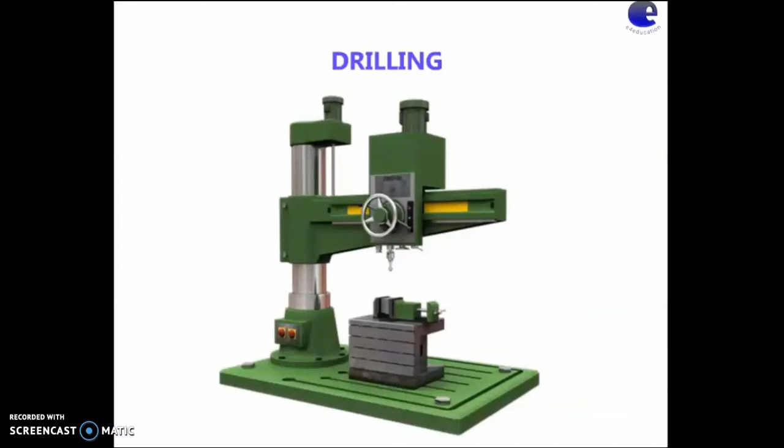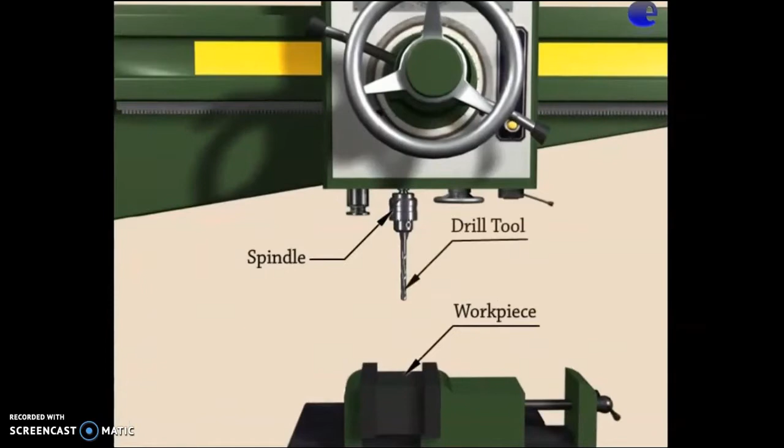Here you can see the drilling machine. Operation of producing a hole in the workpiece is termed drilling. This is the spindle, the workpiece is placed here, and this is the drill tool. This is how drilling is done.

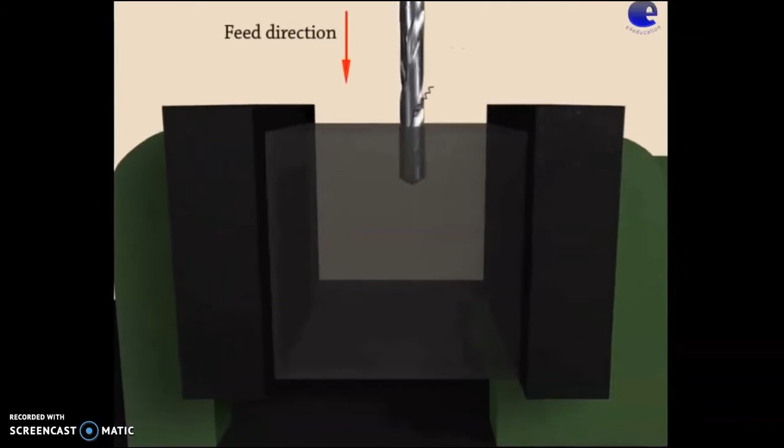You can see a close view of the workpiece and the drill tool. The tool is rotated and it penetrates. This is the feed direction. It is done to remove the solid metal from the workpiece to produce a circular hole.

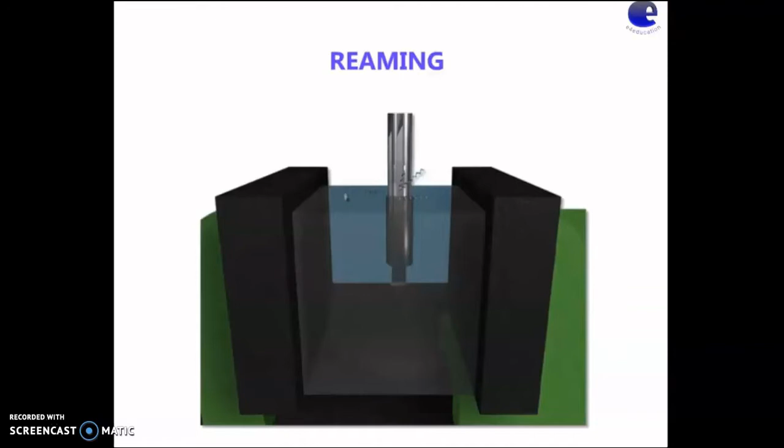Next is reaming. Reaming is the finishing of the already drilled hole, and the tool used is the reamer. It is the operation of sizing and finishing a hole already made by a drill using a tool called reamer.

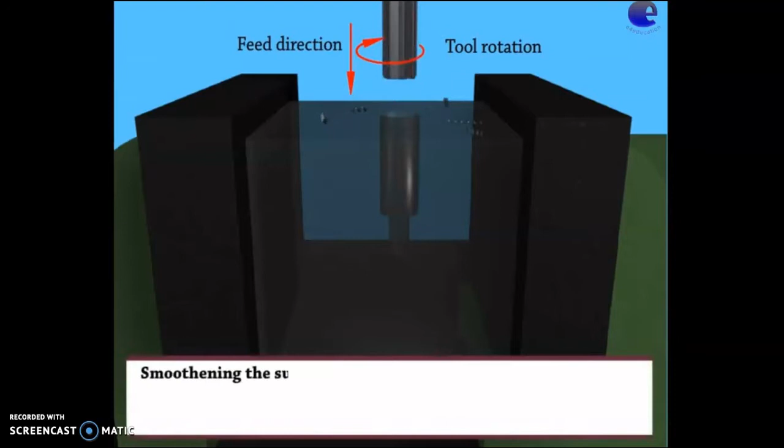This is the tool rotation, and it is fed in the direction like this, smoothing the surface of the drilled holes with a reamer. It removes only a small amount of material, on the order of 0.1 mm to 0.3 mm, and produces a smooth finish and required size.

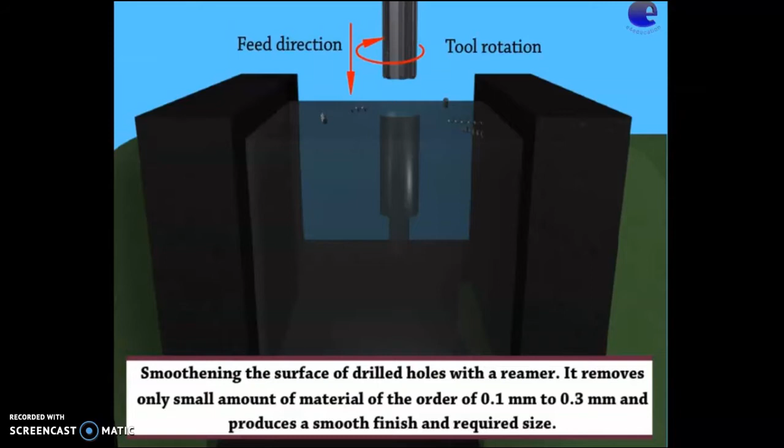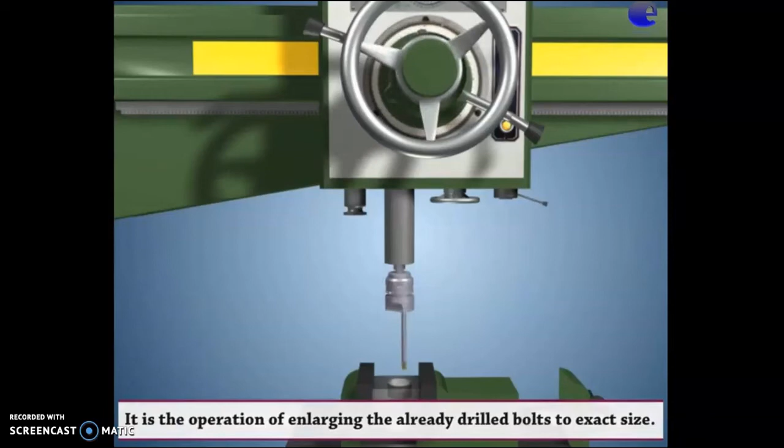Next is boring. Boring is the enlargement of the already made hole, and we can see how it is working. This is the boring tool, and this is the workpiece. It is the operation of enlarging the already drilled hole to the exact size. On a drilling machine, it is carried out by a boring tool like this.

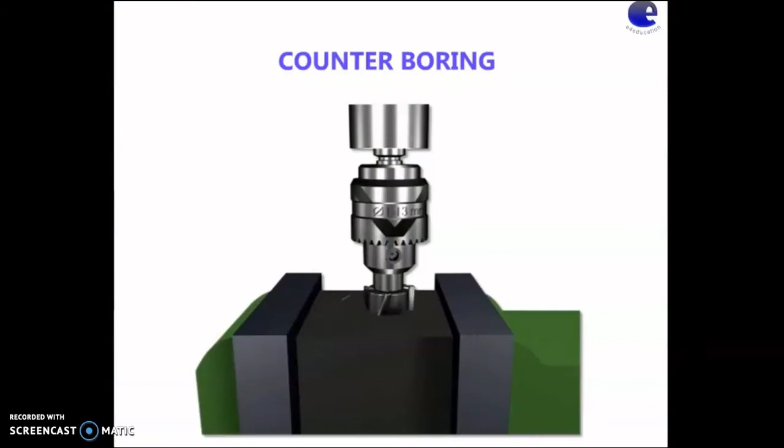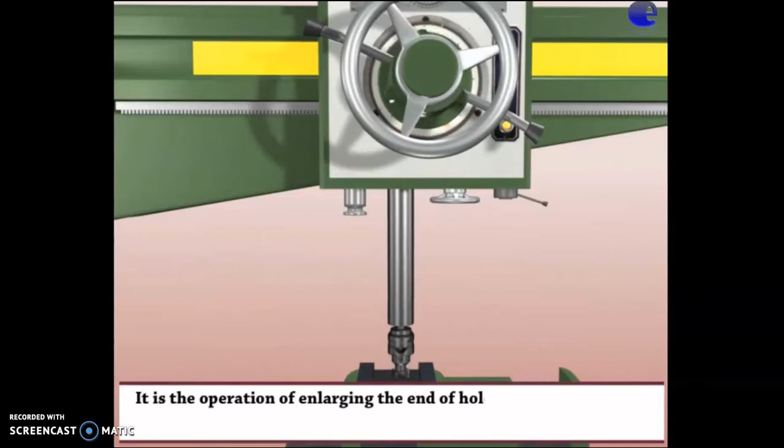Now, counter boring. This is the counter boring tool, here is the workpiece. It is the operation of enlarging the end of the hole cylindrically as for the recess of the countersunk piece. You can see here, it is to increase the size of the hole at one end only, to a small depth, like this.

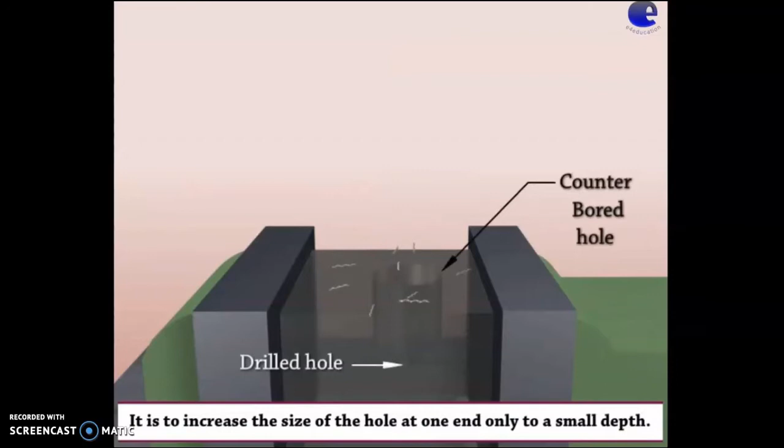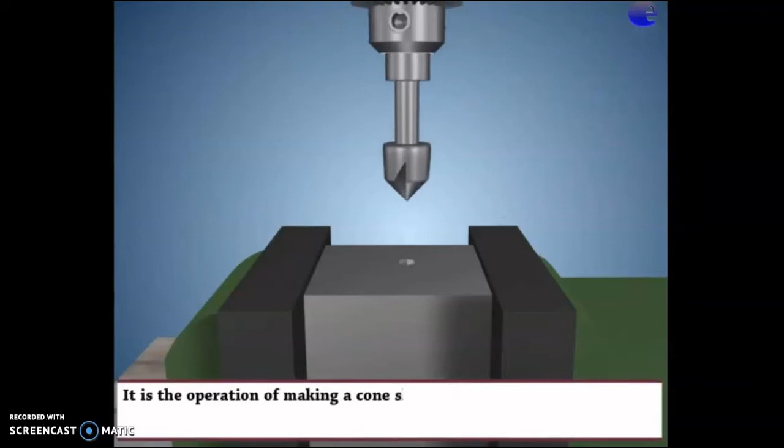Now, counter sinking. This is the counter sinking tool, workpiece, this is the pre-drilled hole. It is the operation of making a cone-shaped enlargement of the end of a hole for the recess. The tool enters the workpiece axially and enlarges the top portion of an existing hole to a cone-shaped opening. So here a cone-shaped opening is provided.

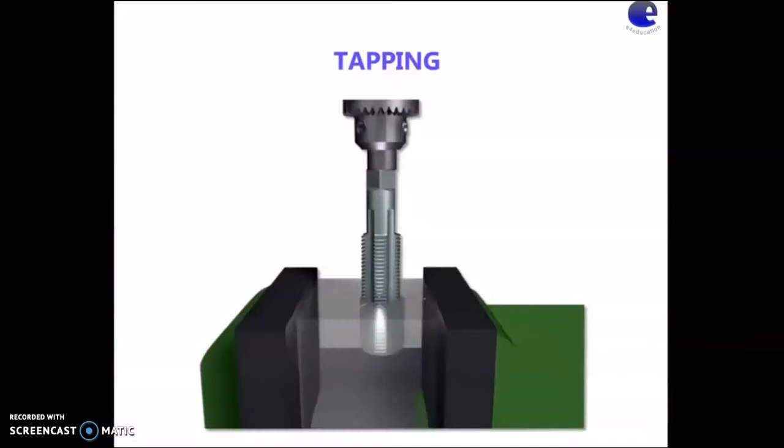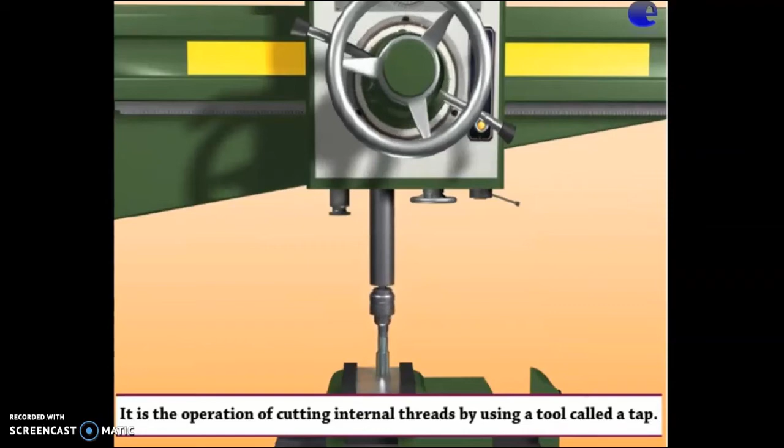Next, tapping. Tapping is making the internal threads. It is made by the tapping tool. Here is a workpiece, tapping tool. It is the operation of cutting internal threads by using a tool called a tap. A tap is similar to a bolt with accurate threads cut on it.

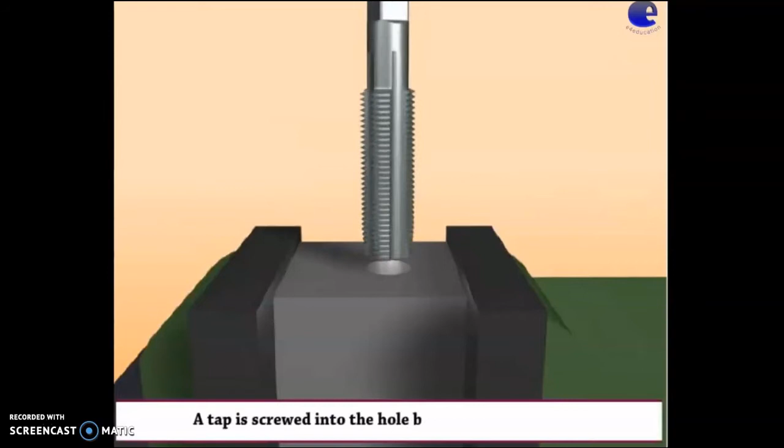And here you can see the closer view. A tap is screwed into the hole by hand or by machine. Now you can see a threaded hole here.

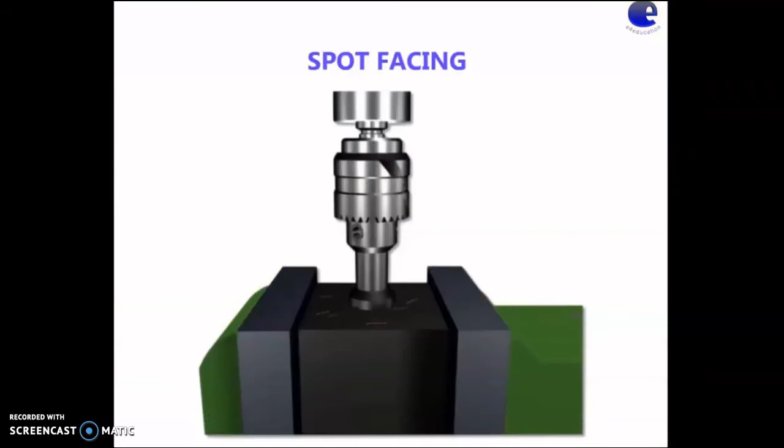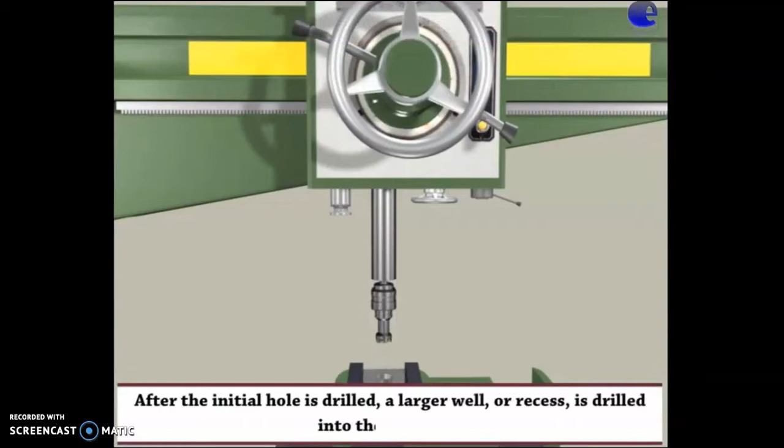Next, spot facing. Spot facing is a mechanical drilling machine process. After the initial hole is drilled, a larger well or recess is drilled into the material. The head of the screw or nail fits into this well. This allows the nail or screw to sit flush with the surface of the item that is drilled.

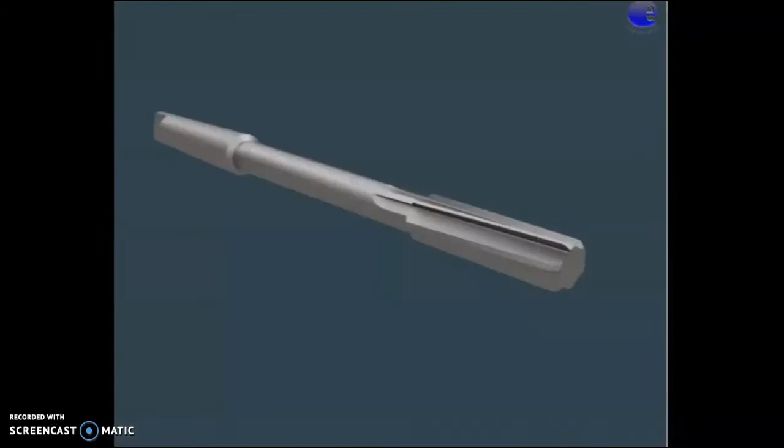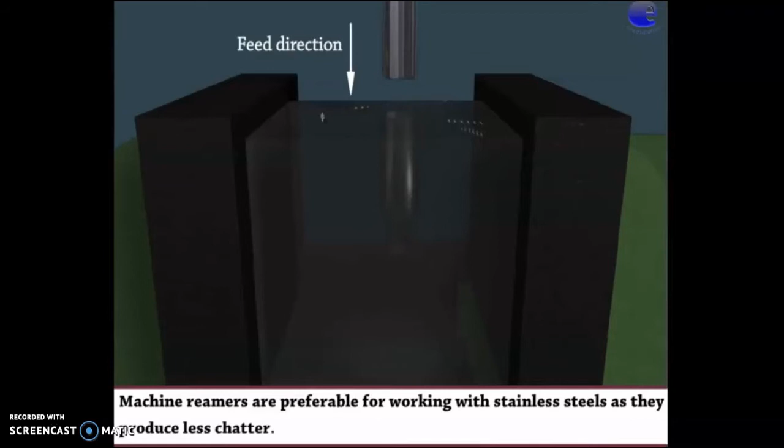Next, machine reamer. This is the reamer tool. Machine reamers are provided with a Morse taper shank for holding in the machine spindle. Machine reamers are preferably used for working with stainless steel as they produce less chatter.

Types of flutes: straight flute and spiral flute. The spiral flute machine reamers help the chips flow better than the straight flute. Here you can see the rake angle.

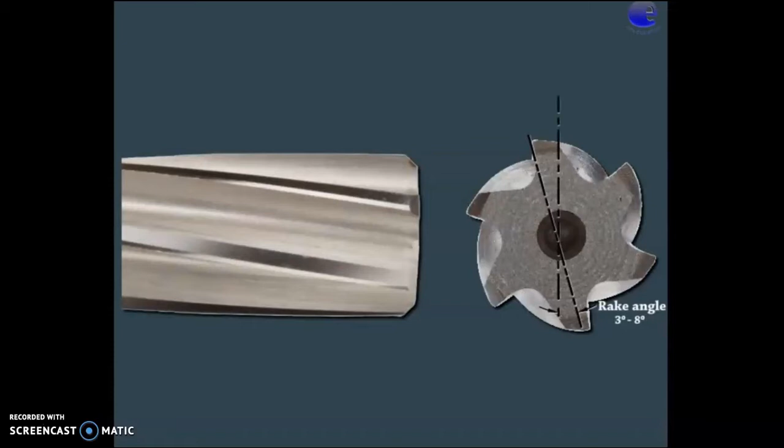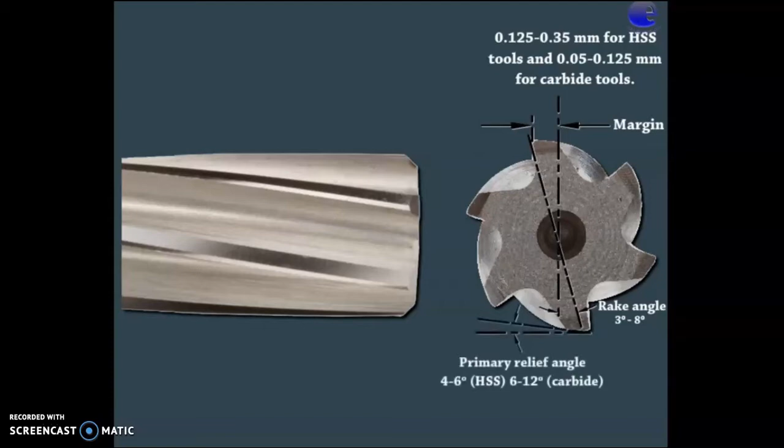Other dimensions: primary relief angles, chamfer angle, chamfer is also provided, chamfer relief angle, helix angle. Parts of drilling machine, first one, drill chuck.

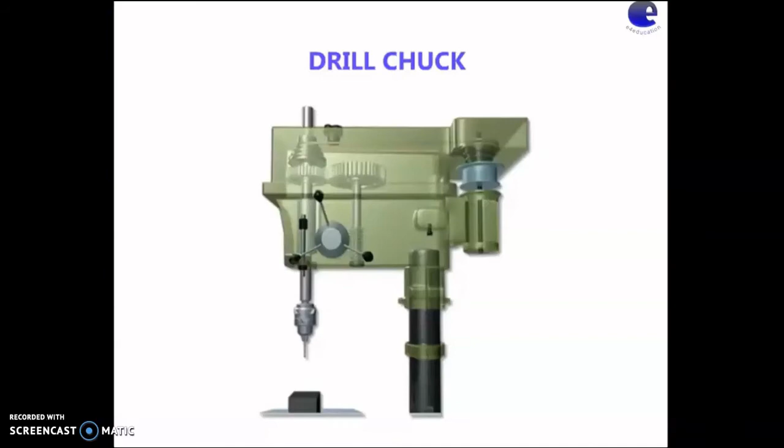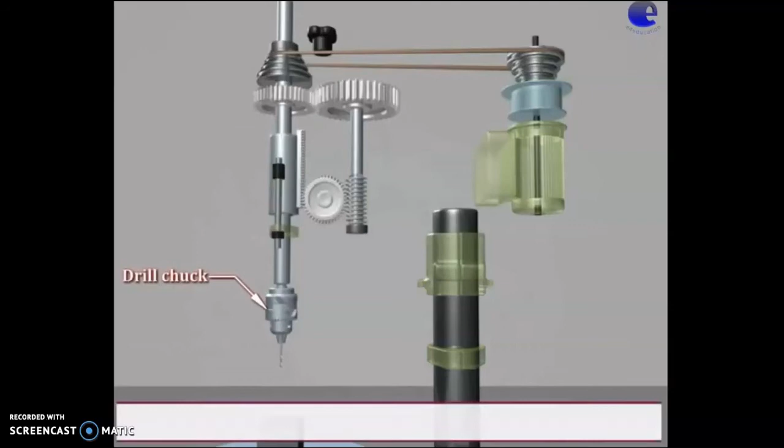Here you can see a drill chuck. It is used on a drilling machine for holding the straight shank drills. The drill is inserted into the drill chuck and locked in the drill chuck by a key to grip the drill rigidly.

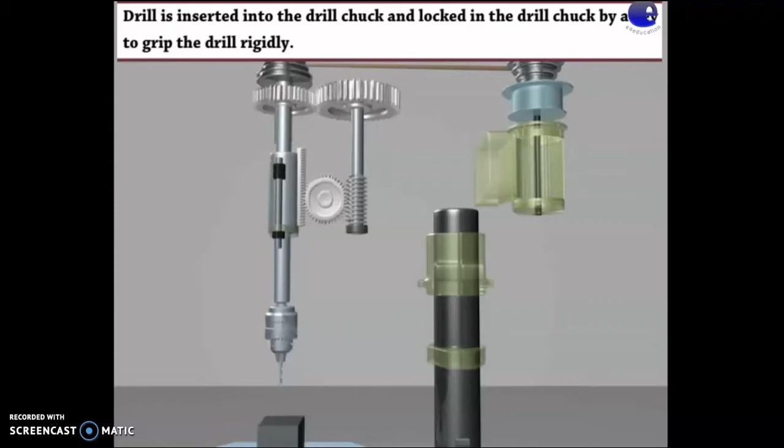Next is drill sleeve and socket.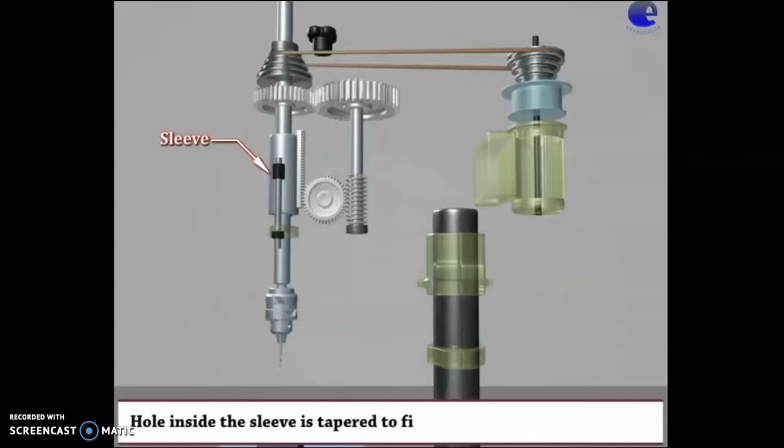This is the sleeve. It gets power from the motor through the bevel gear. The hole inside the sleeve is tapered to fit the tapered shank of a twist drill. This is the socket. A drill socket is used to hold a twist drill with a shank which is too large to fit into either the drill spindle or sleeve.

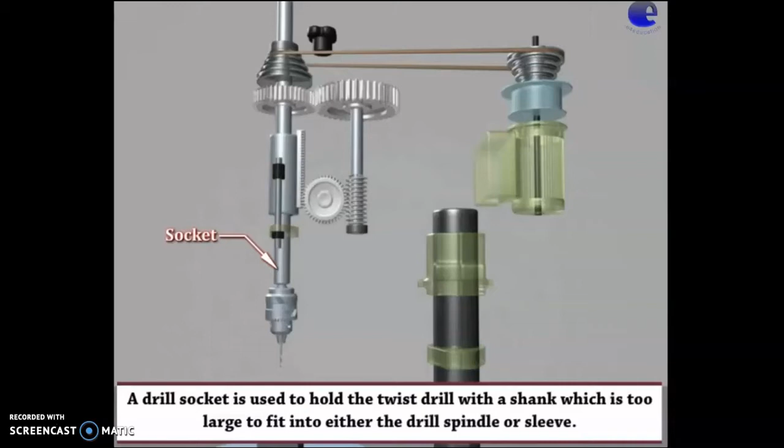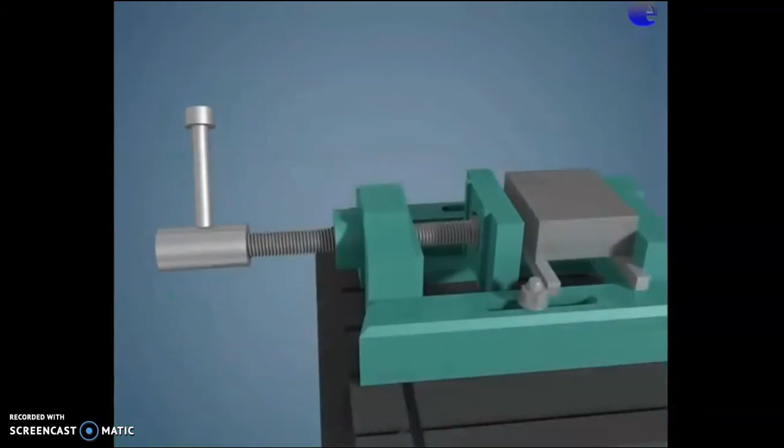Machine vise. This is the machine vise. This is a packing piece, and the workpiece is held on the machine vise by screwing. This is the fixed jaw and this is the mobile jaw.

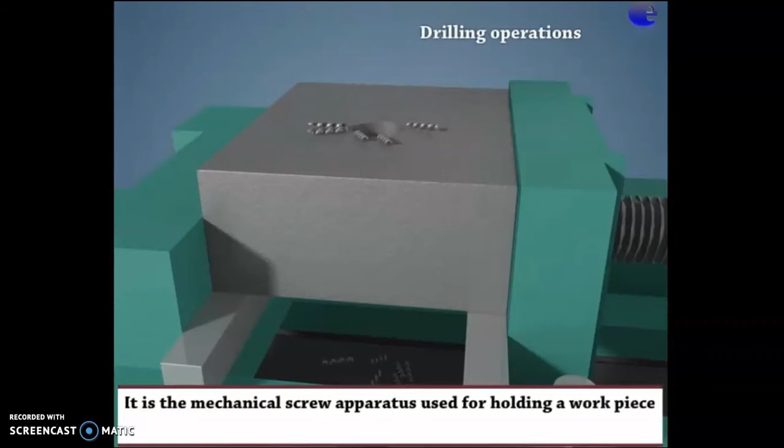Now after placing, the drill bit is rotated. It is a mechanical screw apparatus used for holding a workpiece to allow the work to perform operation.

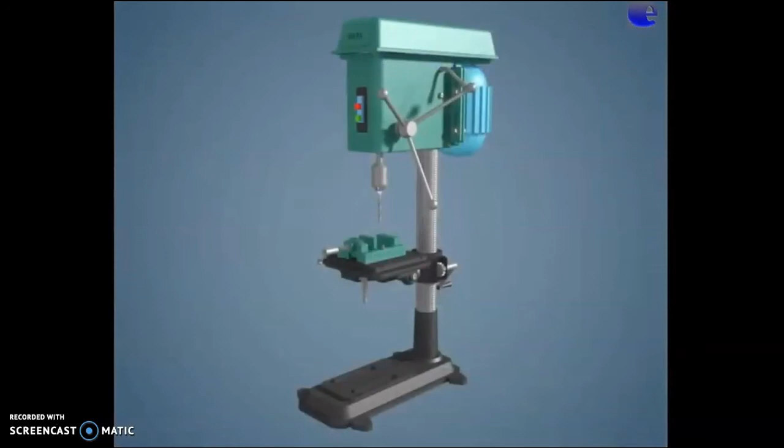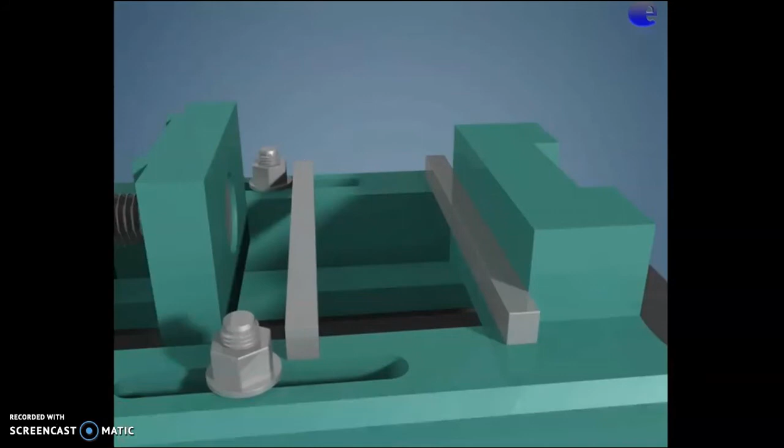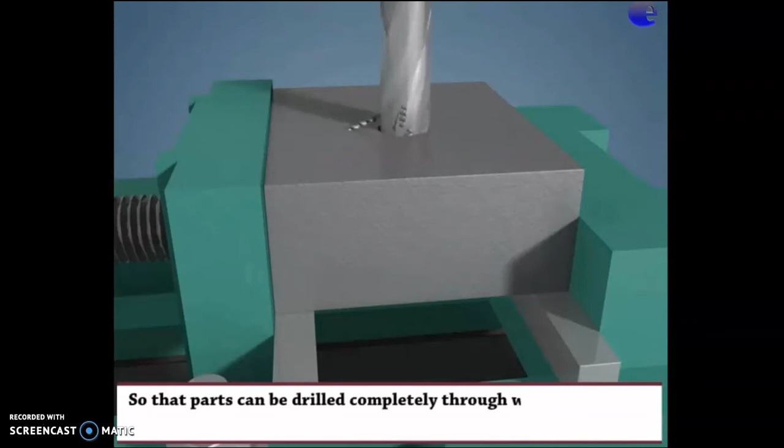Drill parallel. It is a packing piece kept under the workpiece. Here you can see a machine vise and two packing pieces or parallels are placed. It is a pair of steel rectangular bars which is accurately machined, and the workpiece is placed over that. It is used to raise the workpiece above the drilling machine table so that the parts can be drilled completely through without damage to either the vise.

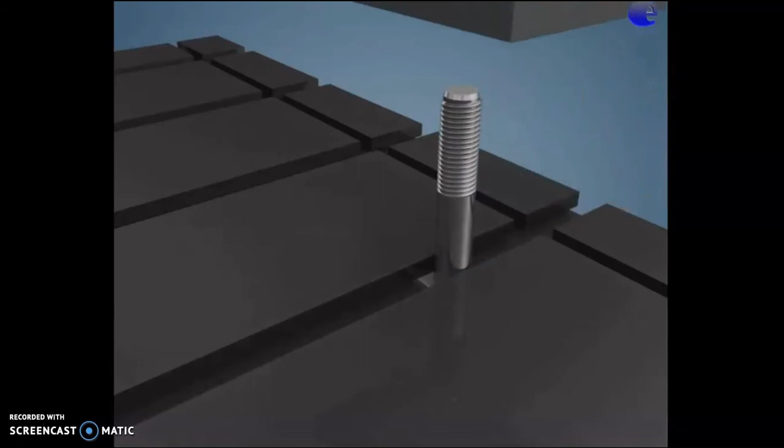Next is clamps and bolt. You can see here T-slots. The screws are placed there, and the clamps are used to hold the device. Using this, packing should be as far as possible of the same height as the work.

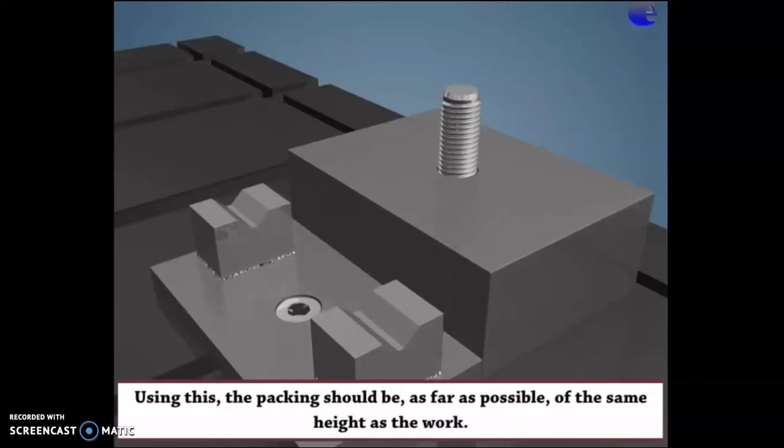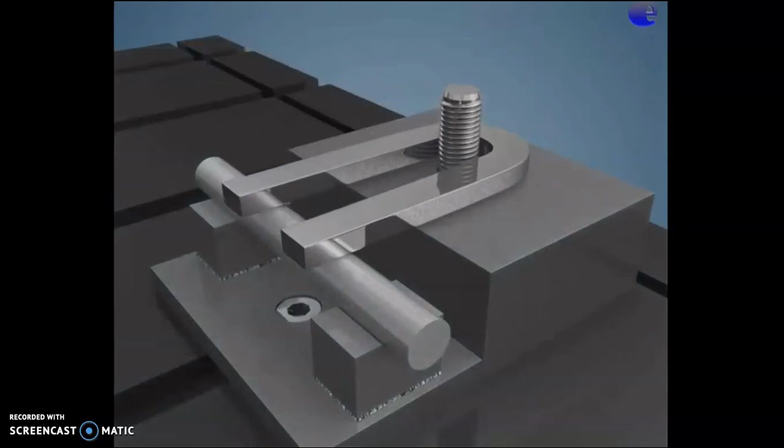This is the work and this is the clamp. It is a packing. Using clamps and bolts, the workpieces can be held very rigidly.

Now V-blocks. You can see the V-blocks. The V-blocks can be placed around complex objects. See, this is the V-block, and we can see how V-blocks can be used to hold the workpiece. It is used to hold a cylindrical workpiece.

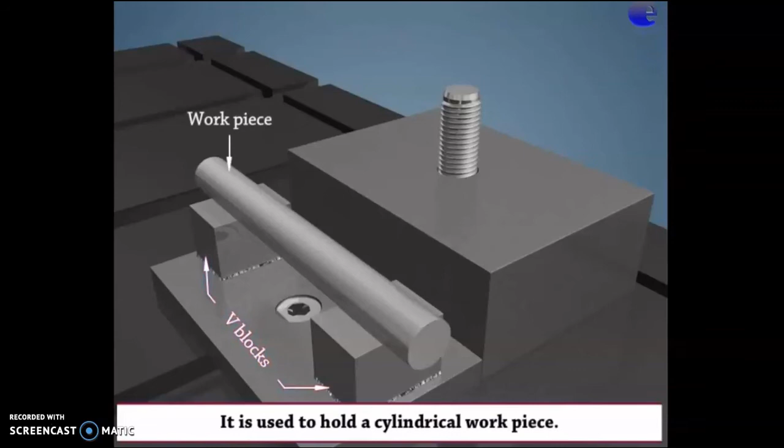Next is box jig. Jigs.

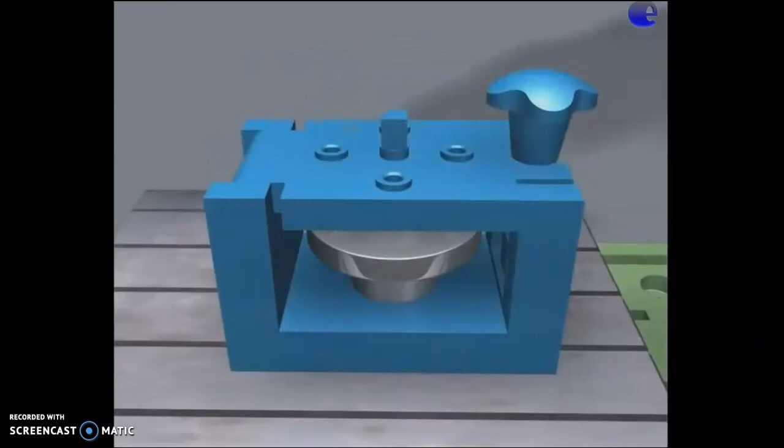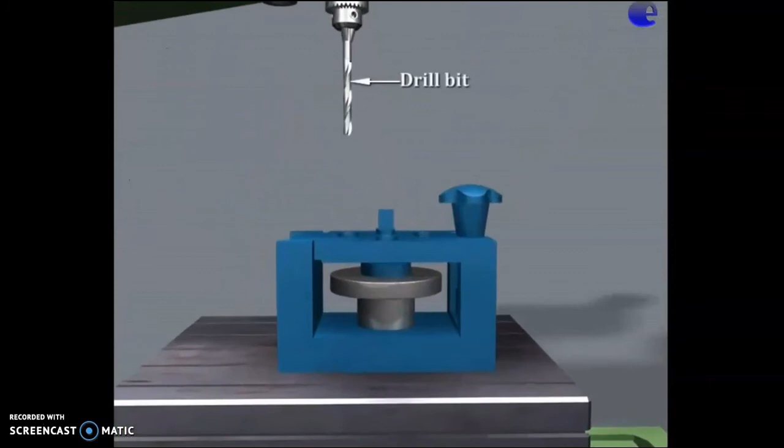Radial drilling machine. This is a radial drilling machine, and here you can see the motor and the column. This is the drill bit and the workpiece. We are performing a drilling operation there. Jigs are used to hold the workpiece and also to guide the tool while performing the operation.

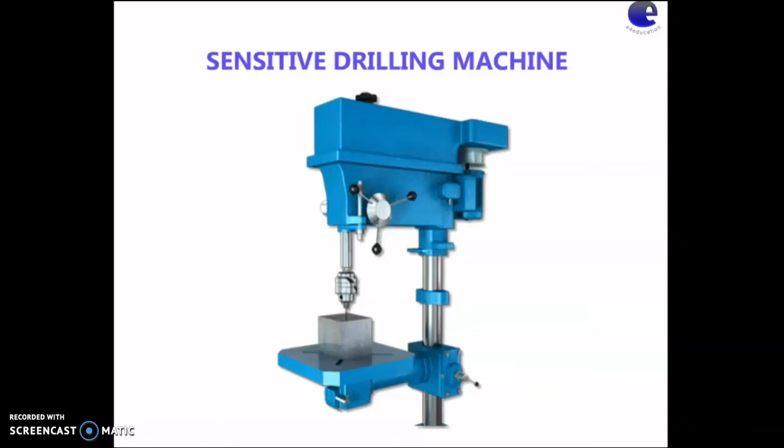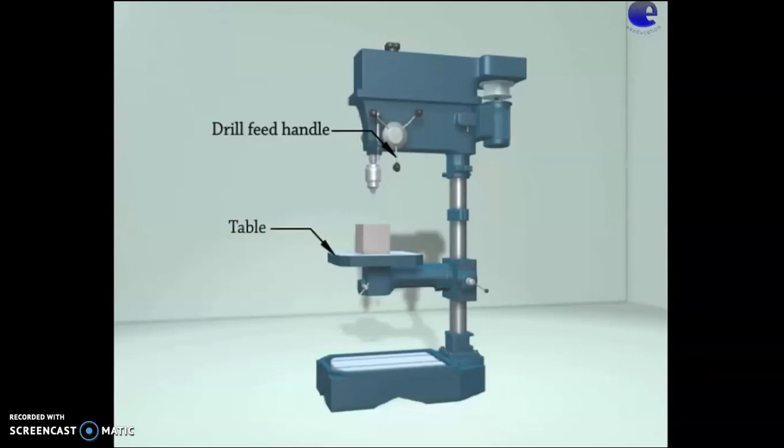So, types of drilling machine. First one is sensitive drilling machine. Here you can see the 3D model of a sensitive drilling machine. This is the drill feed handle, table, column, table clamp. It is light in weight, and the feed is given by hand. As you can see here, the spindle is moved.

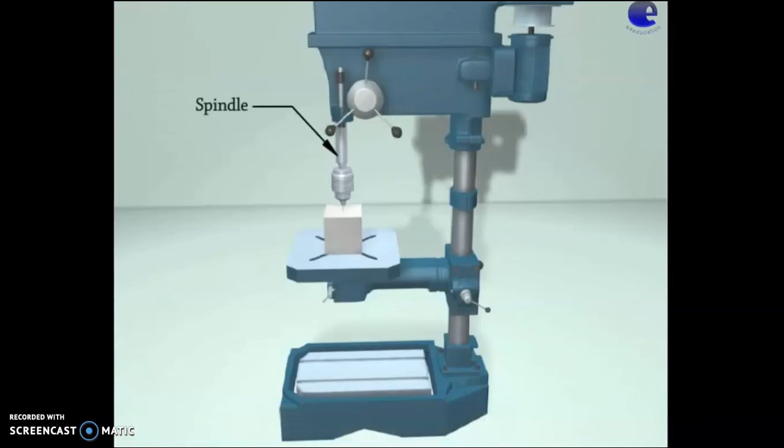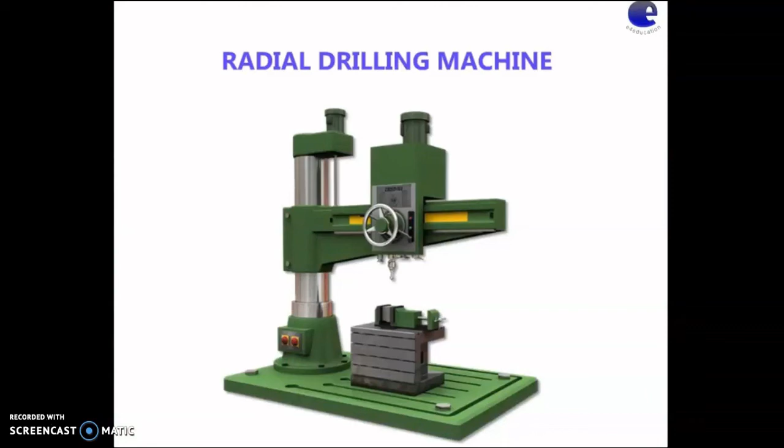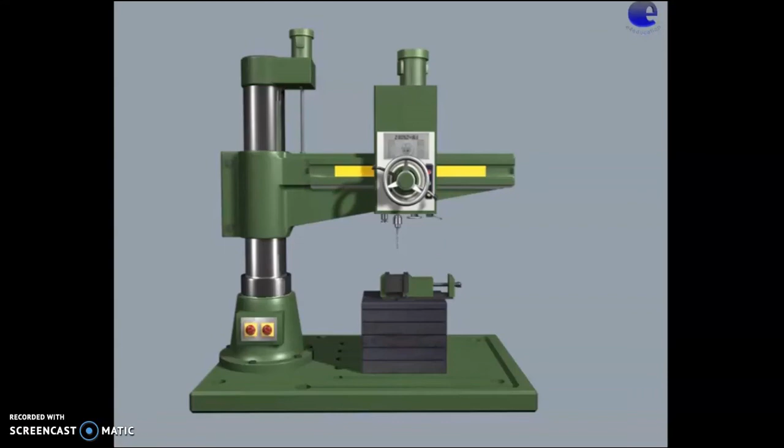Next is radial drilling machine. This is the 3D animation. The arm can be moved about the column. It can be moved up and down. Also the head moves in and out. The drilling operation, you can see a drilling operation done here.

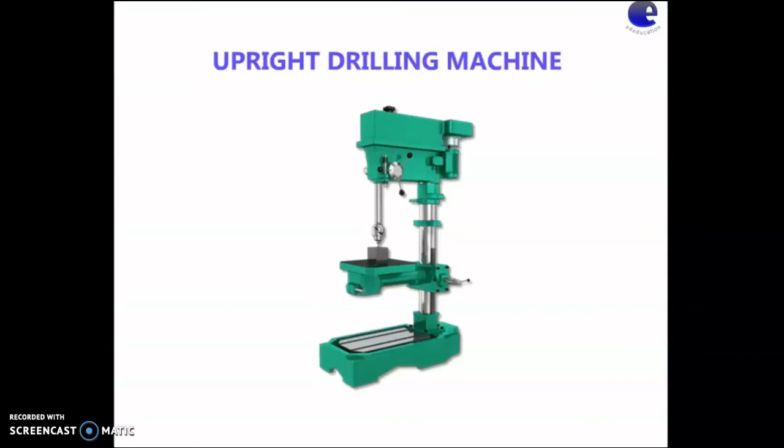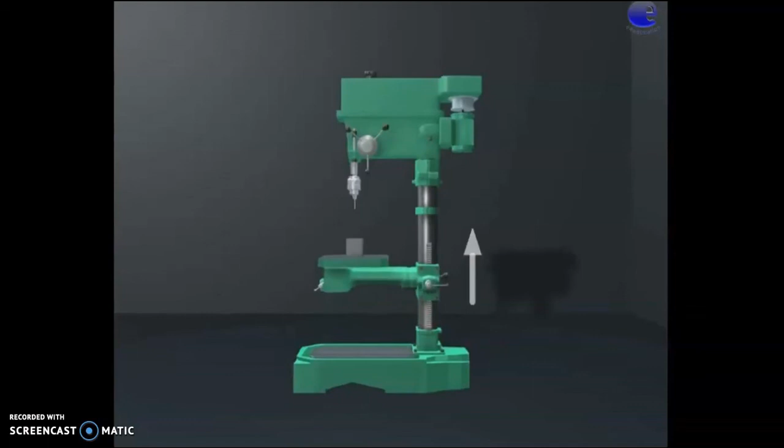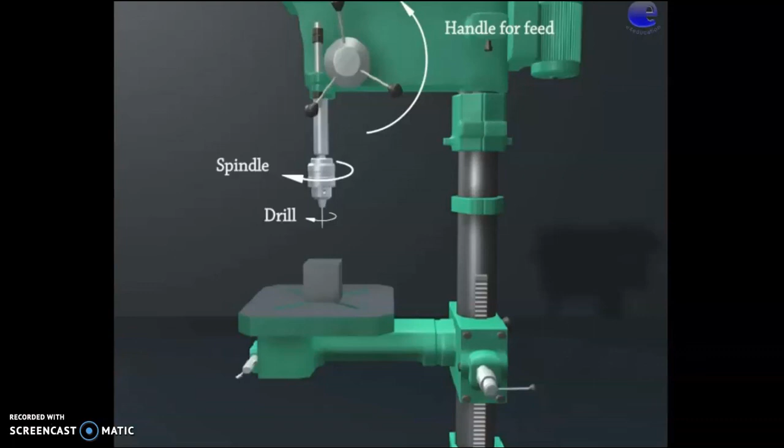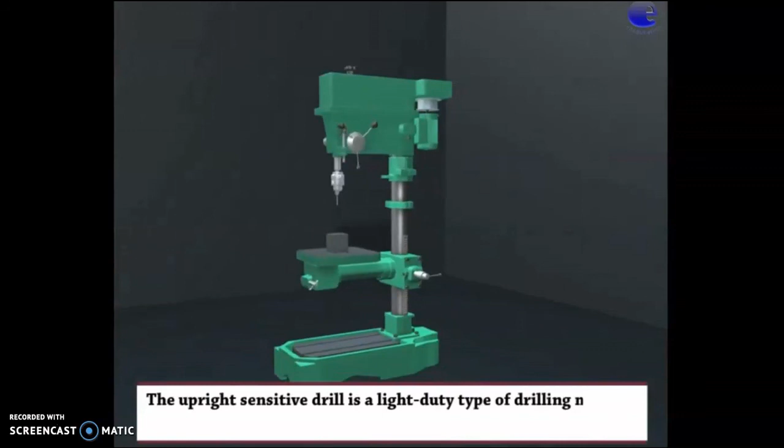Upright drilling machine. This is the 3D model of the same. The workpiece is moved upwards by lifting about the column. Hand feed is given; by giving the hand feed, you can see the spindle moving in one direction and in the opposite direction. The upright sensitive drill is a light duty type of drilling machine that normally incorporates a belt drive spindle head.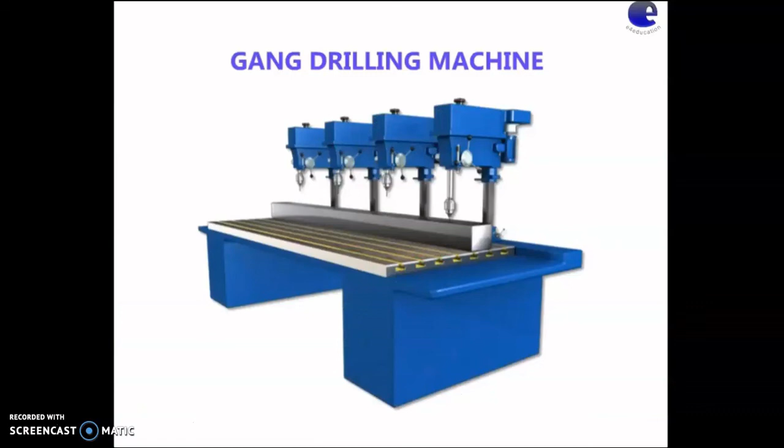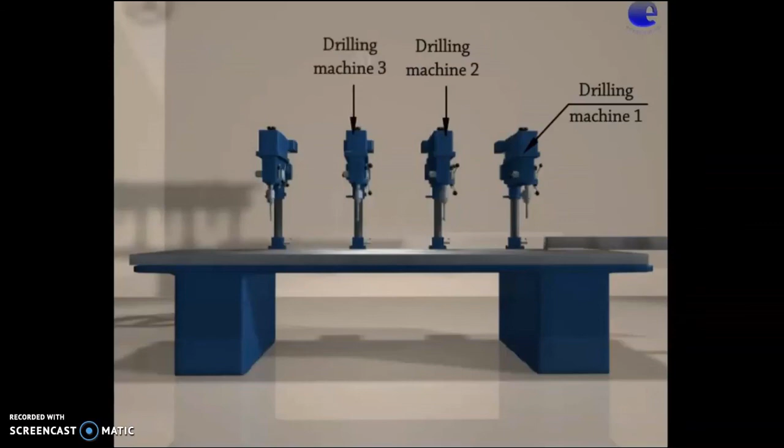Next is gang drilling machine. Here a gang of drilling machines are used. Mainly more than one drilling machine is used for different purposes, different operations, or sometimes the same operation. Here drilling machines 1, 2, 3, 4, and the workpiece is fed like this.

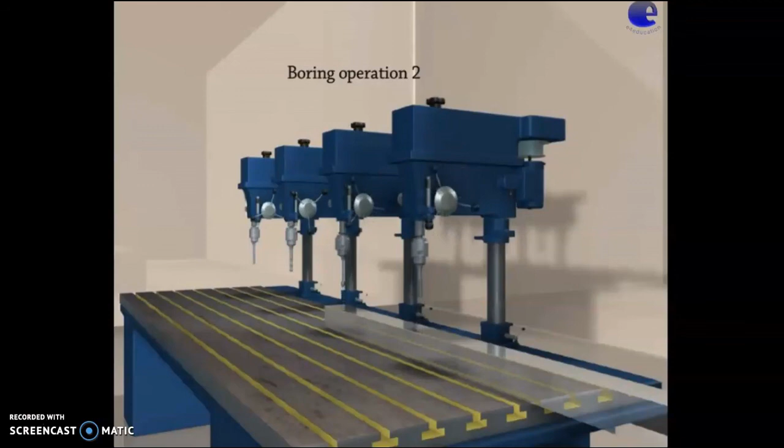First, in this case, the first one is a drilling operation, the second is a boring operation, third a reaming operation, fourth a tapping operation. So for mass production and all, we can do this type of drilling. Speed and feed of the spindles are controlled independently.